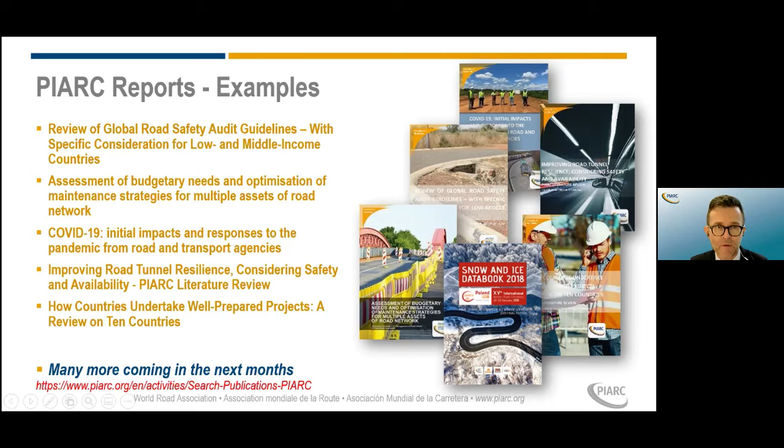All these reports are available from our website, and on average, we publish one report every month approximately. That's an average, but it gives you an idea of how many reports you can find on our website. We also have online manuals.

These are actually websites focused on road safety and asset management, which I think could be interesting for today. They were updated in 2019, and they are very, very easy to use. You can check them from your smartphone if you want. They are presented in a way that is, I hope, very easy to understand.

They are not only one report, they are a gateway or a portal to lots of knowledge, which is nicely structured. Software such as HDM4, QRAM to help manage the transportation of dangerous goods in tunnels—this is also us. So as you may see from our website, we have hundreds of reports available. That's a lot, but we need to continue, because roads and road transport keep improving.

In many countries, roads represent about 80% of all inland transport, and they're really the gateway to remote or rural regions in particular. In urban areas, roads are needed for cars, buses, car sharing, electric vehicles—all these fashionable transportation modes—most of them require roads.

This is why we at PIARC believe roads are key for equity, inclusivity, and accessibility. Roads are ready to support many sustainable and low carbon developments, and roads are here to stay, they're not going to disappear. This is why we keep on working to improve the roads.

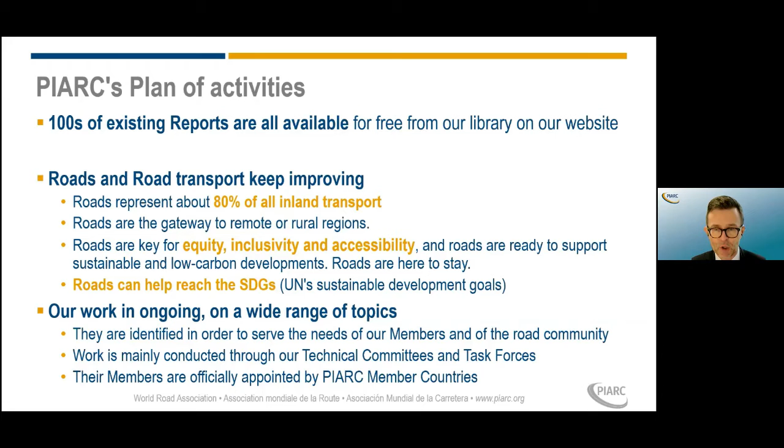We identify a large number of topics so that we serve the needs of our members and of the road community. The work is conducted through our technical committees and task forces, as I was presenting, and the members of those task forces and committees are officially appointed by PIARC member countries. So we are very open, but very focused on serving the needs of our members, and in particular of our member governments.

We develop a work plan that covers four years, and this plan is quite detailed, as you may see from our website, but it also reflects global trends, including trends that go beyond roads. For the 2020 to 2023 period, including today, those cross-cutting issues include climate change and resilience, which are very relevant for the seminar today, tomorrow and the day after, road safety and innovation. This is the picture of our strategic plan.

Winter service is here, but you may be interested in many of these other topics, maybe not today, but for a future seminar.

Winter service is really well positioned together with asset management and road safety under the umbrella of safety and sustainability. This committee is led by my colleague, Peter Nutz, who will be presenting as well and who is even moderating this seminar on PIARC's behalf.

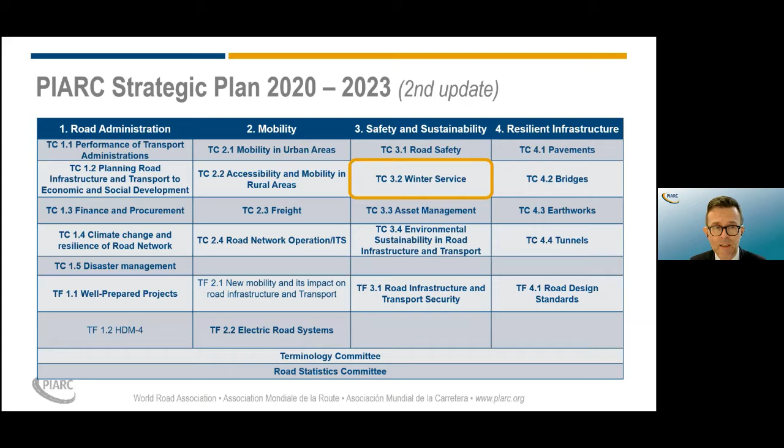Together with his team, he's developing a large number of knowledge products and reports and organizing a congress. Some of us have asked PIARC to work on COVID.

We did that. We published a report about a year ago on the impact on roads. It's true that the impact has been very significant, continuing even after COVID. But we should not forget that we still have to address all societal challenges: to reduce the carbon footprint of transportation, to help fight extreme poverty, to improve access and mobility for all, and to increase road safety.

So we have to mix the impacts of COVID, such as digitalization, with all these policy objectives, and we help our member countries make policy choices that combine all these aims.

This is why it's important to continue sharing information. What you are working on in Ukraine is probably very interesting for Argentina as well, and vice versa. So this is why PIARC exists: to help you colleagues meet and share your ideas, maybe share your issues or problems as well.

We organize lots of events, such as today's event, and we have many others planned. Just last week, we organized a seminar on climate change adaptation with Uganda. In March, we will organize another one on rural areas with Paraguay. We also have conferences, such as the Symposium on Pavement Characteristics and the Conference on Tunnels Operations and Safety, which will take place in September and October next year.

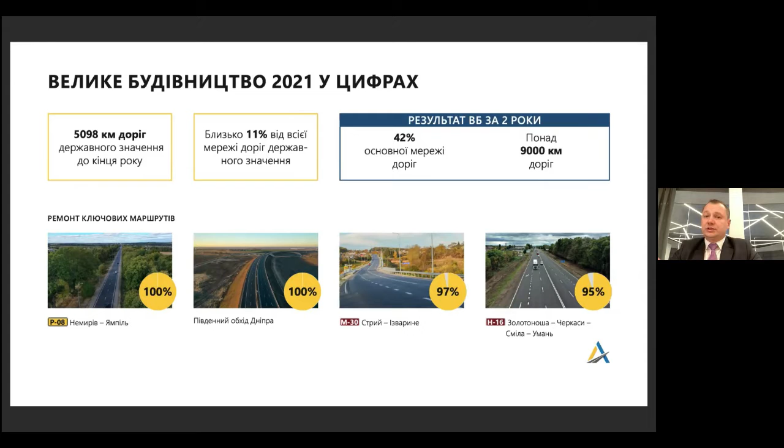So you see the images of the objects that were completed this year: R08 Nemyriv-Yampil, and the southern bypass of Dnipro. This week we will open this road. This is also the M30, an international road.

This is the longest road in Ukraine, 1,400 kilometers, and 97% of it is completed. It's high quality, well done, and completed in a very short period of time.

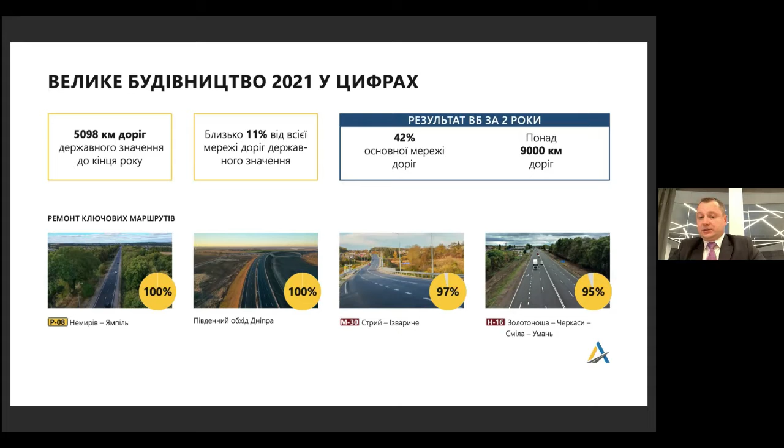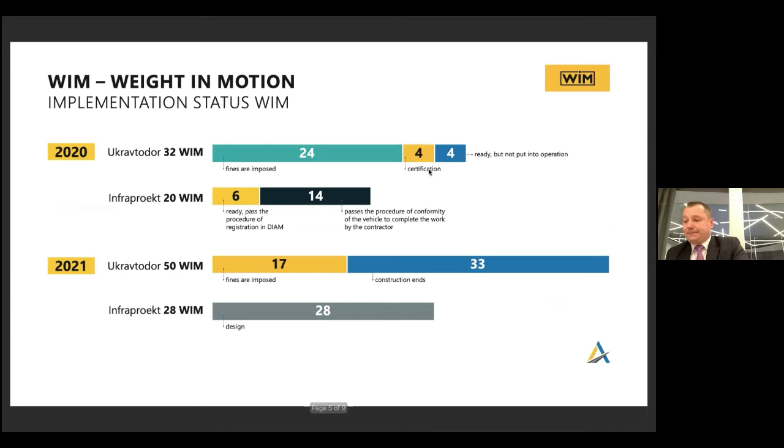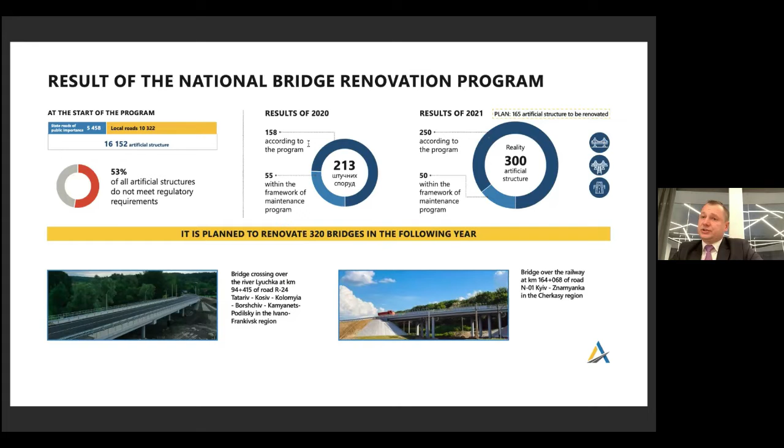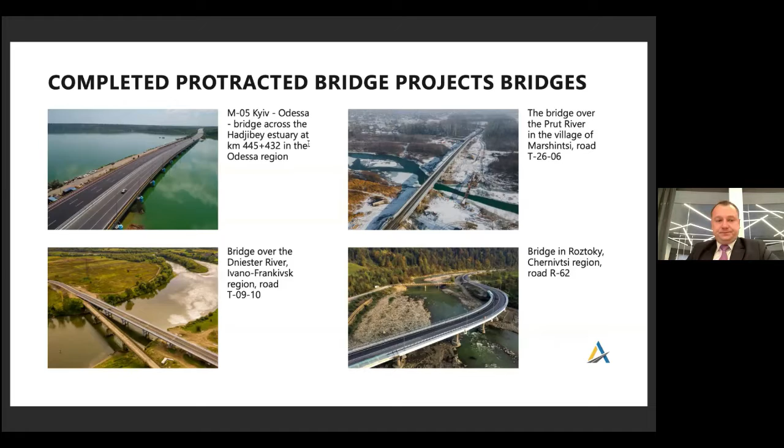So for the future, these are the plans. We hope for the next several years to complete 770 new bridges and 15,000 kilometers of motor roads. Our primary direction will be working with Kyiv bypass road.

Last week, the procedure for bidding was announced, and so we're in process of bidding. When the subcontractor wins the bidding procedure, we will move toward construction of the bypass road for the Kyiv area.

Also the commercial road, 280 kilometers, Krakovets-Lviv-Brody-Rivne. The substantiation documentation is being prepared and will be filed by the end of the year. Then we'll have 2 more months for approval, and this will be a concession road planned to launch in the near future.

Kharkiv-Dnipro. This will be a very important connection between 2 major cities. Also construction for M24, to lead to the border with Hungary, and then M14 Odessa-Mariupol. And then we'll continue this road to the places where it's not reaching out yet.

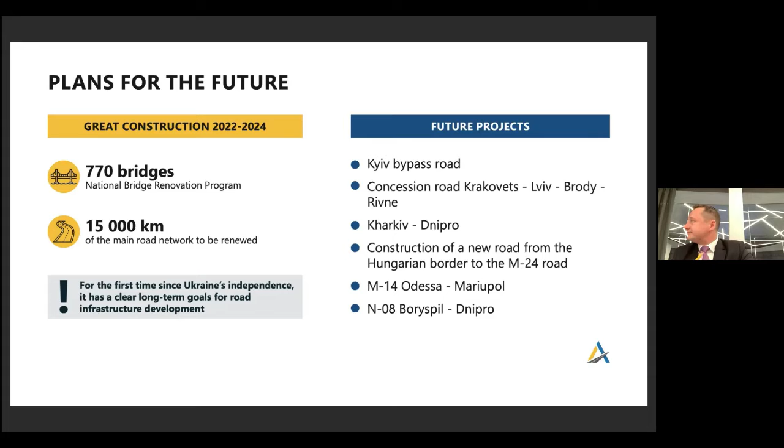So Ukravtodor has built the plans for 10 years of future development. I believe that with joint efforts, we'll be able to transform the country and its roads. So let's move forward. Thank you for your attention. I'm eager to answer your questions if you should have any.

Thank you, Andrij. So from what we see from Andrij's presentation is that the Ukrainian road industry is skyrocketing, and it will require, of course, new technology. Ukravtodor is now implementing digital technologies, and I think that this seminar will be helpful to implement new technologies in terms of road exploitation of the new roads and new bridges we have in Ukraine, or we are expecting. So, Andrij, thank you one more time, and I think that it's time for Peter Nutz to join us.

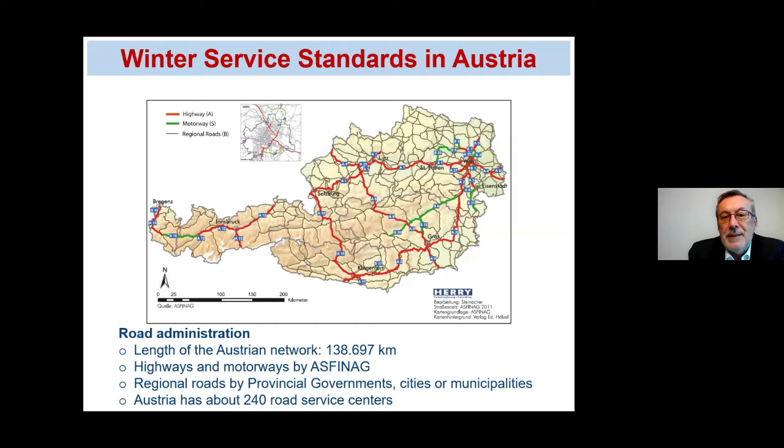You can see the road network here, the largest portion being municipal roads, and the smaller, higher-category network being highways and motorways operated by ASFINAG. These are all salt spreading routes for winter service. On other routes, it depends on the amount of traffic, and gritting material is also used in Austria.

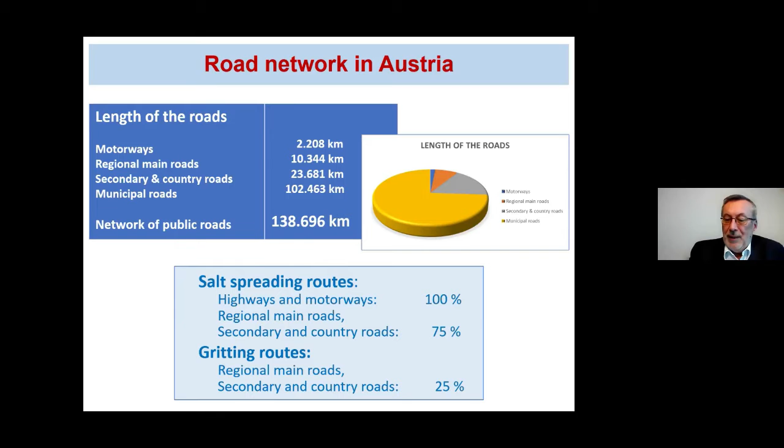As I said, motorways and federal highways are administrated and operated by ASFINAG, a private organization that earns money from road use. National roads are administrated by the 9 Austrian federal states, who are responsible for the road network in their state. Municipality roads are administered by the cities or municipalities themselves.

The legal requirements for roads in Austria: we have the Austrian General Civil Law, called ABGB, with paragraph 1319A on liability of the keeper of the road. This applies for both summer and winter. If a person is injured or something is damaged because of a defective condition of a road, the person responsible for the proper condition is liable. This means we have to do winter service, and we are responsible - whoever is the owner responsible for this road or way.

Then we have in the road traffic regulation a paragraph on duties of residents. Residents also have to do winter service in front of their houses. In local areas, residents must clear the sidewalk along the house from 6 o'clock in the morning to 10 o'clock in the evening and grit it in case of icy conditions. They have to do this work themselves, or make a contract with someone else who does it. If there is no sidewalk, the roadside must be cleaned and gritted in a width of 1 meter in front of the house. So residents also have to do winter service.

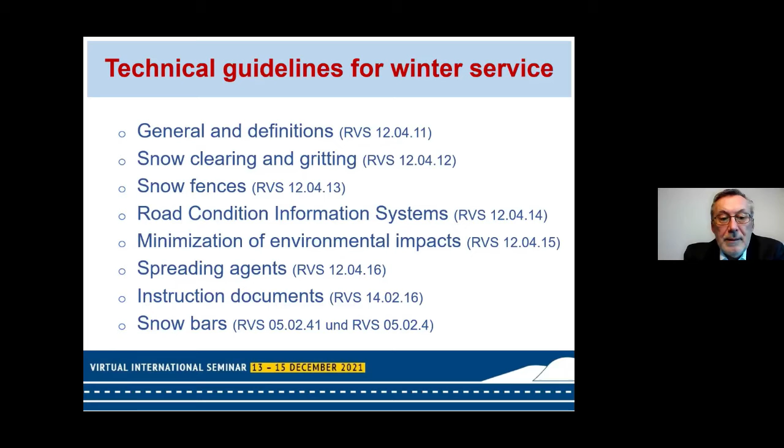What are the winter service standards in Austria? We have for highways and country roads 4 different categories, depending on the amount of traffic. The highest category A is for highways and express roads, and the winter service there must be done around the clock.

The cycle time is a maximum of 3 hours. That means within 3 hours, the snow blower and spreading car must be back, fit to start the next round. That's a minimum standard.

We have highways with a cycle time of about 40 minutes. At high level country roads, about 5,000 vehicles per day ADT, with a cycle time of 5 hours, winter service is done from about 4 o'clock in the morning to 10 o'clock in the evening. That's the minimum standard. Whoever is responsible for the winter service has the opportunity to order winter service around the clock in case of this situation.

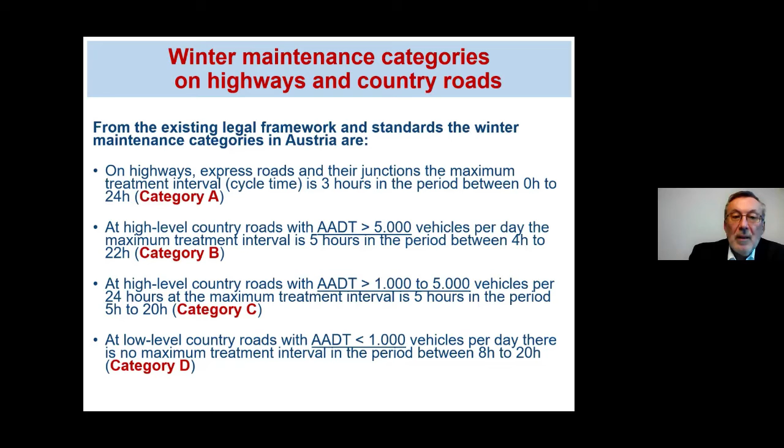This table shows what they have to do in category A. The left column shows the weather situation: light snowfall, heavy snowfall, snowdrift, avalanches, extreme ice, and freezing rain. It shows what the winter service stations have to do, including the maintenance cycle time. That's all for highways and country roads.

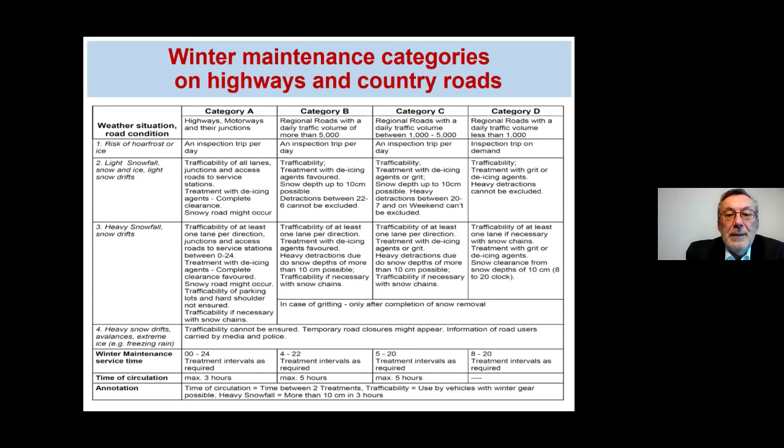For urban areas, cities and municipalities, there are standards with 7 priorities. Priority 1 is the highest, for inner city main roads, going down to priorities 4 and 5 for cycling lanes, which also need winter service. The last ones are priority 6 for sidewalks, and priority 7 for parking areas.

And also for different weather situations, the standards are written down showing what the winter maintenance stations have to do as a minimum, in cases of slight snowfall, heavy snowfall, and so on.

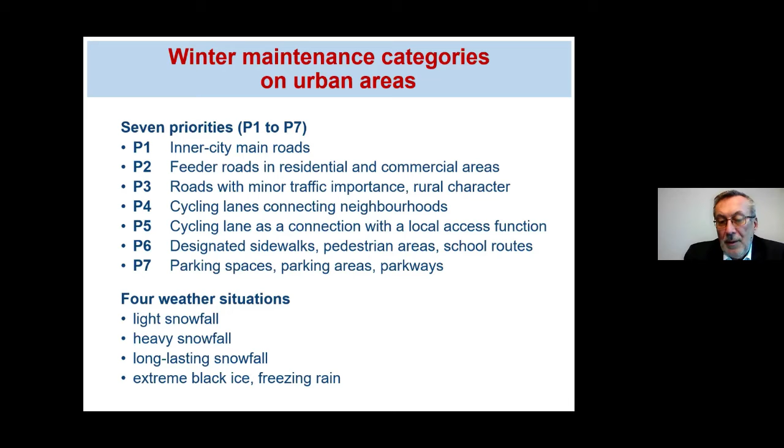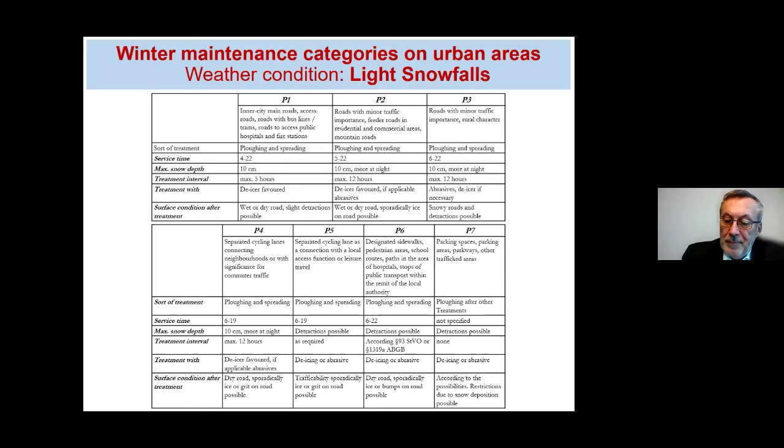In Austria, we started 10-14 years ago with winter service research projects. The first was to optimize pre-wetting salt application. The pre-wetted salting standard was FS30, 30% brine and 70% dry salt.

We asked in Austria, what can we do with other brine amounts, like 50% or 70% brine? We had a research project with the Technical University of Vienna, where Peter Nutz works and also worked on this research project. We found new spreading sheets with other amounts of brine that we had written new.

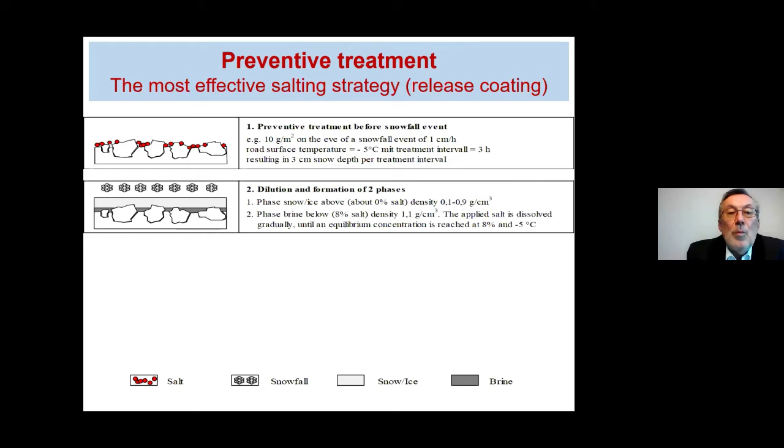They built a release, a film on the road surface so the snow cannot freeze on the road surface, and you can work well with a snowplow. Here's the next picture: the film on the road surface, and you can clean it and spray it again, and do that as long as the snow is ending.

Because of this research project, our spreading machines were changed, because we need more brine tanks on our trucks. The first step, we did it with additional brine tanks, because we sprayed more brine and less dry salt, because we see that the residual salt on the road surface is higher if you use more brine.

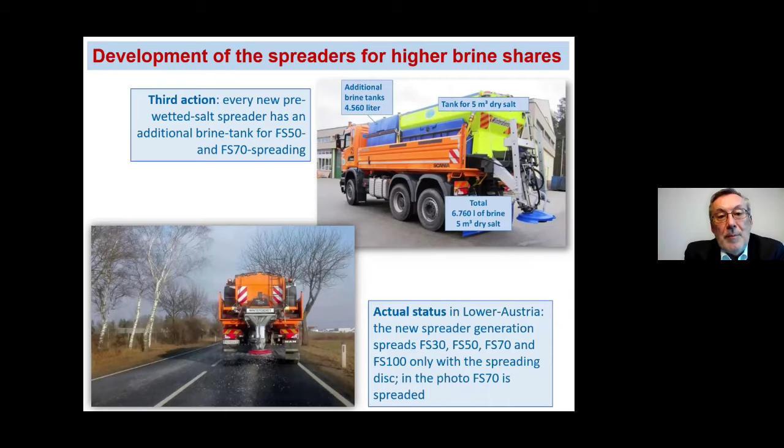And we can reduce the salt consumption: FS50, called 50% brine and 50% dry salt, to 20%; FS70, 70% brine and 30% dry salt, for 40% reduced salt consumption, compared to the former standard FS30 with 30% brine.

It's a good instrument to optimize your winter service. And when we discuss what did you do, we have also compared how much brine the different organizations use. And in the federal states, at the maintenance stations, we have charts where we compare the different maintenance stations in similar climatic conditions.

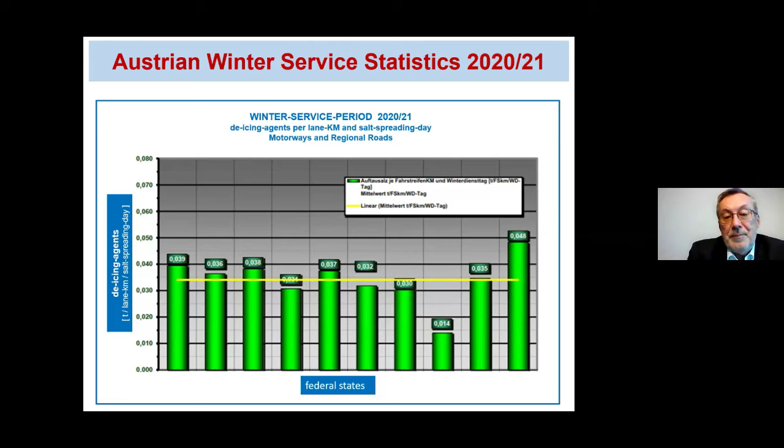So thank you. Then I can say what the standards in Austria are, the rules for winter service within Austria, and what we are working on with research projects to optimize our winter service there.

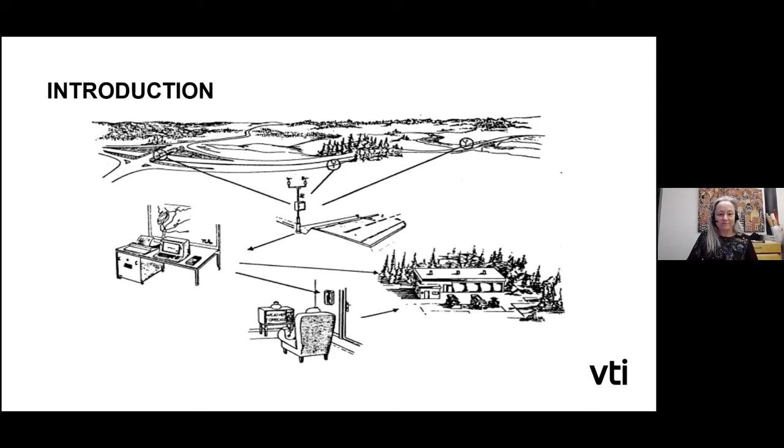And now he can get all this information back to his phone or computer in the office. And he has a lot of different other sources to use to get the weather forecasts, temperature, precipitation, road conditions, friction measurements, and everything you can wish for. It's there, you just need to organize it in a good way.

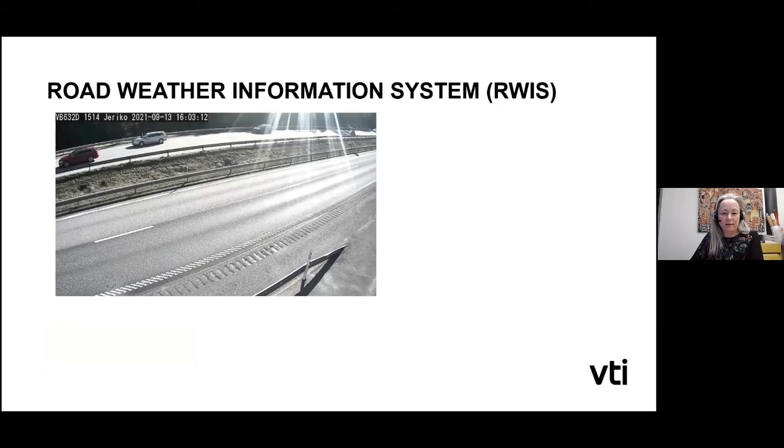The road weather information system stations, at least many of them, have cameras on today. It could be of good help to see if the road is dry, snowy or slushy, but sometimes it's too much snow so you can't even see the road - there's a snowy road between all the snowflakes. This was a couple of weeks ago, close to where I live. The snow is still on the ground.

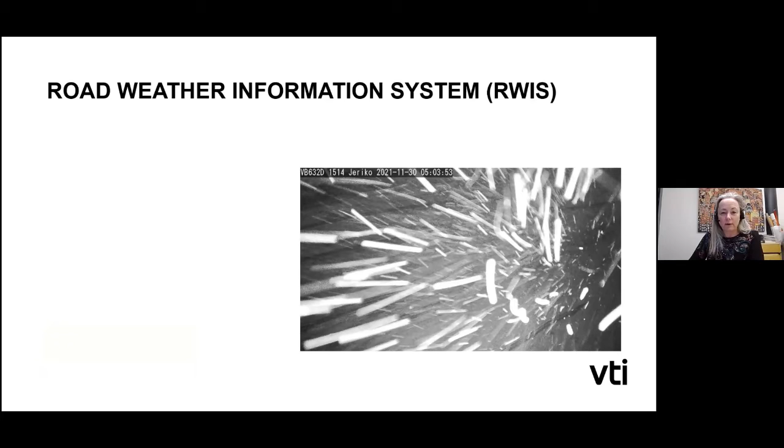We also have connected cars today that can tell the operators or drivers coming behind you about warnings if the road is slippery ahead.

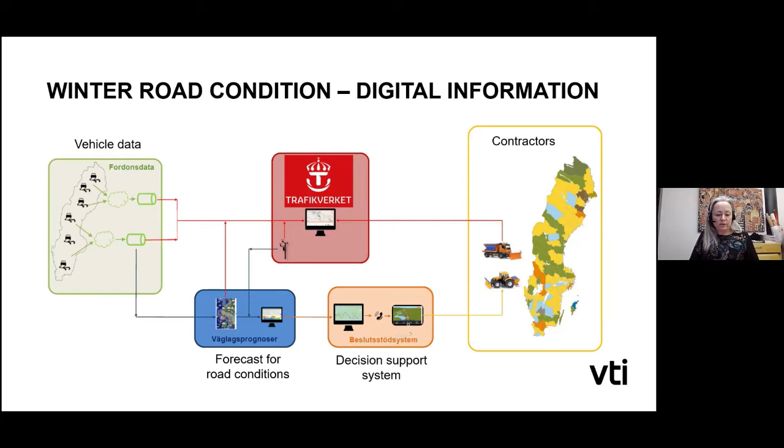This vehicle data can actually be used both to check if the actions have been done properly, for the NRAs to check up, or for forecasters to use as help for self-control when they do the forecasts for coming hours. The forecasts go to decision support systems, and the contractors can use it to make good prognosis on when it's time to go out and do the actions on the road.

The project I was involved in was called Dynamic Forecast Controlled Winter Road Maintenance. We took all different kinds of data and put it together, and I'm going to tell you a little bit about it.

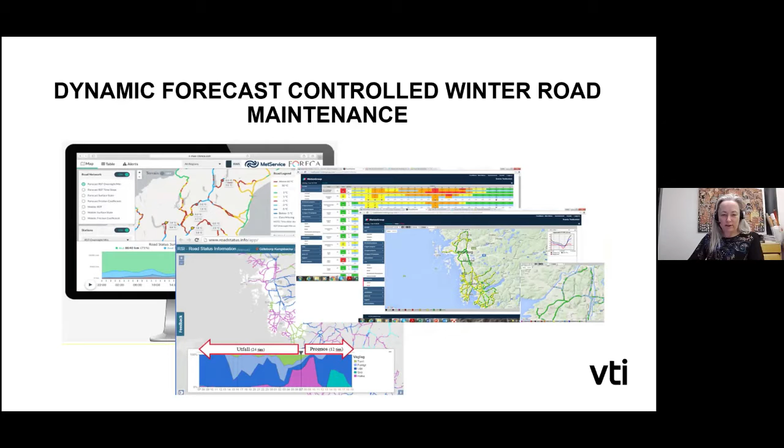We have several road weather forecast services that can provide qualified support for decision makers today. They can easily see forecasts for road conditions and temperature precipitations. The service provides a dynamic road condition forecast, and in some cases even gives proposals for the different actions needed on the road.

The main advantage with these systems is that the forecast can clearly show you which part of the road needs to be addressed and where you actually need the most salt, or if salt is already there from the last time you were out doing your action.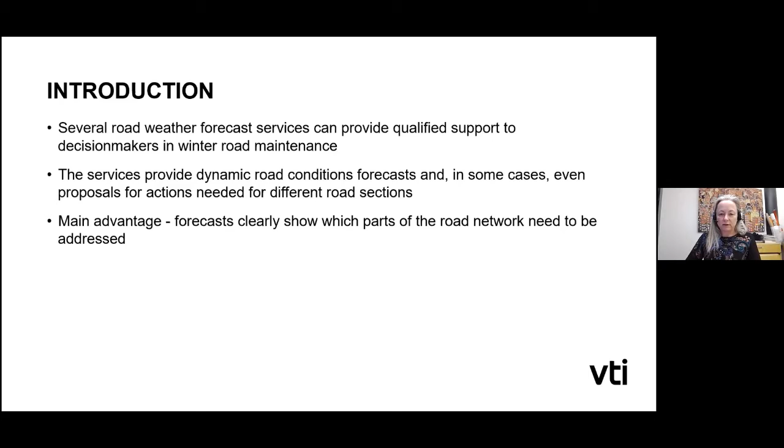So if we have all these systems to help us, how can we make it easier for the driver, and get all this information out to the person driving the truck and doing the salt spreading?

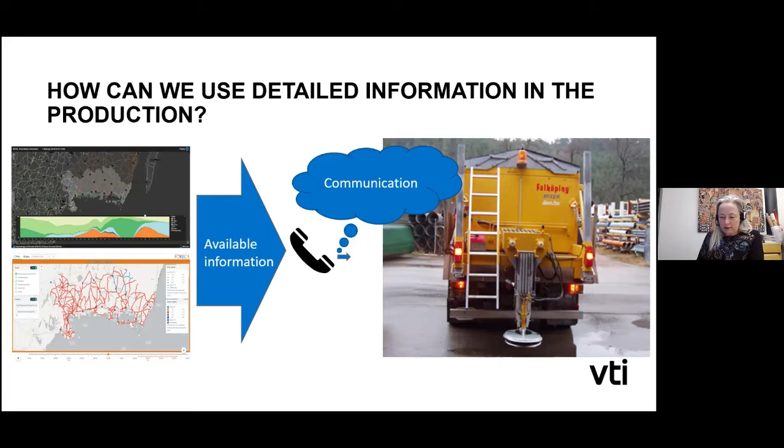This project mostly took care of preventative salting. Plowing and all those things is to come in the future, I hope.

So why do we want to make it dynamic optimization? We want to do it because we can have different weather in different sections of the road, and if we can optimize this, it's going to get us more money in the end. We're going to save money in the end.

Today we have a labor market that's very flexible. We have short contracts, increased delivery controls, personnel retiring, and it's quite difficult to get personnel to work in winter maintenance.

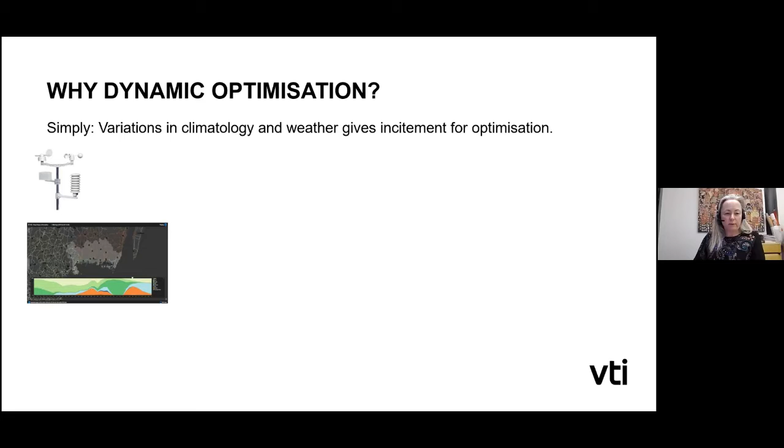With these new systems, we can actually take the road weather station data, get a bigger picture of it, see how the weather is going to be in 4 hours or so, and plan ahead in a different way.

If this light gray area is the area you need to treat, there are lots of bigger and smaller roads, just as Josef told in his presentation, with different types of roads requiring different kinds of treatments.

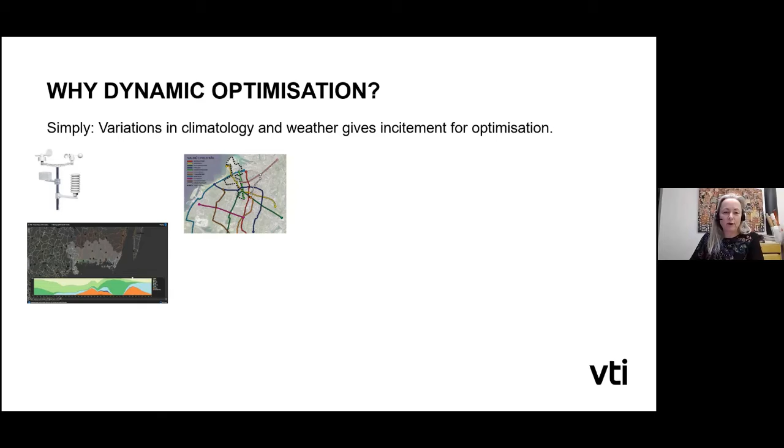If we have a route optimization of this, it could look like this, with different cars driving in different colors. Some sections of the road are really complicated to drive.

But if we take all this and put it together, then we know, okay, I have the need of 5 cars or something, then I call them out. I don't have to call them one by one as you used to. You can use the computer, and the computer calls or sends them a text asking, would you do this route?

Can you go out and do your work in an hour? And the driver can say, yes, I'm fine, I'll do that. Then he gets the navigation route sent to his truck, and he just goes to the truck, starts driving, and gets instructions.

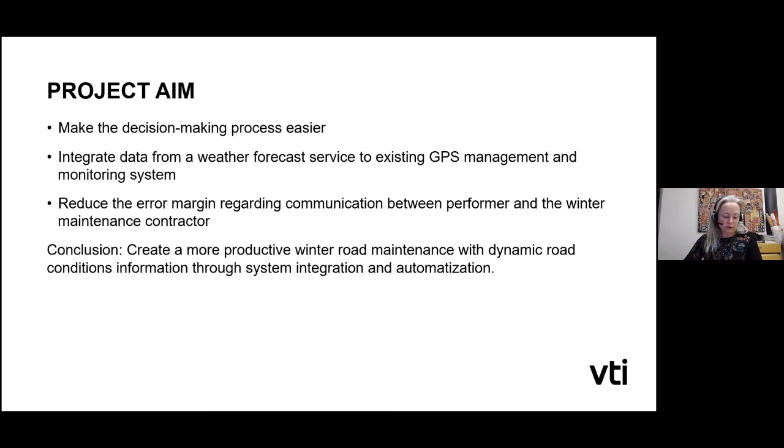The aim of the project was to make decision making easier for the people taking decisions, integrate data from the weather forecast service into existing GPS management and monitoring systems, reduce the error margin regarding communication between performer and the winter maintenance contractor, and get more productive winter road maintenance with dynamic road conditions through integration and automation, and in the end, a better road.

The project has been in 5 phases so far. The first phase was to try to see if it actually worked to do like we thought it should be done. The second phase was to implement the project and try to adapt it in the real world.

We started by trying the call out, then the call out with a static route. The third thing we did was the call out with navigation on the static route, and finally call out with navigation and dynamic route.

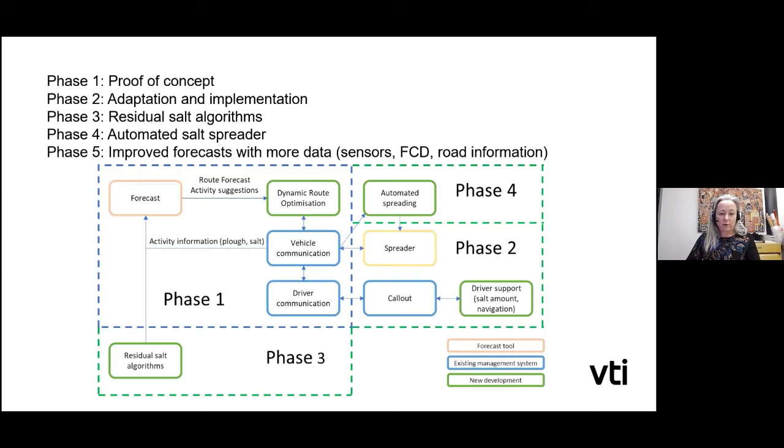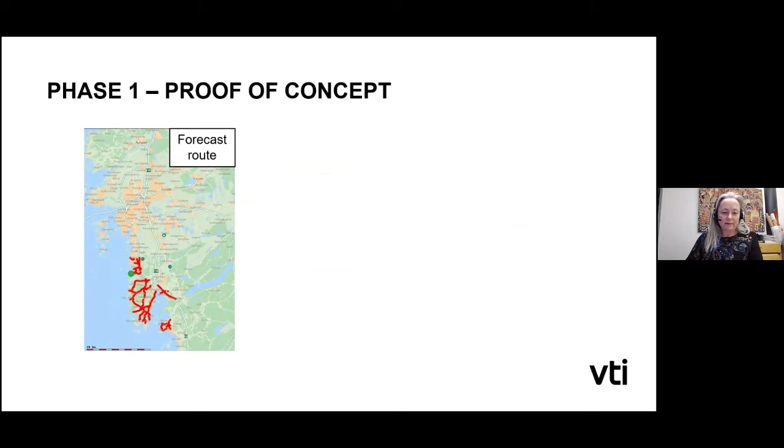This is from phase 1, where we had the forecast. The red shows where it should be slippery according to the prognosis. You need salt. We did an optimization with 2 vehicles and got this example.

So it could have been a lot cheaper than it actually became for the manager this day. But since he didn't trust our prognosis, he did it the way he usually does. Better to be safe than sorry.

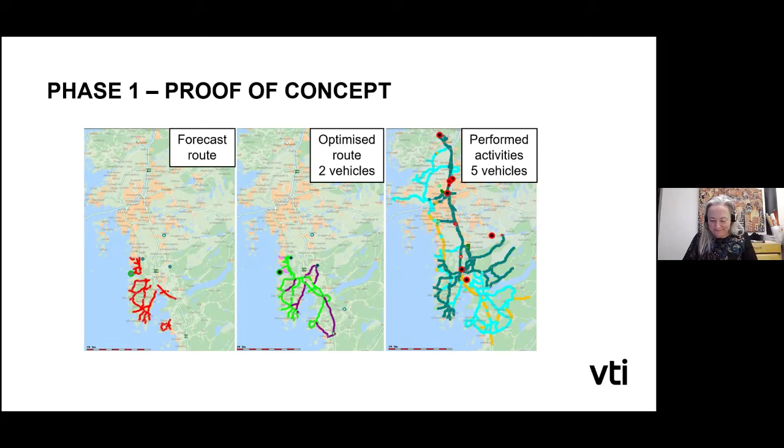And we saw that the concept was working: calculated reductions in machine hours, reduction of salt and emissions by 15 to 25% throughout the winter season.

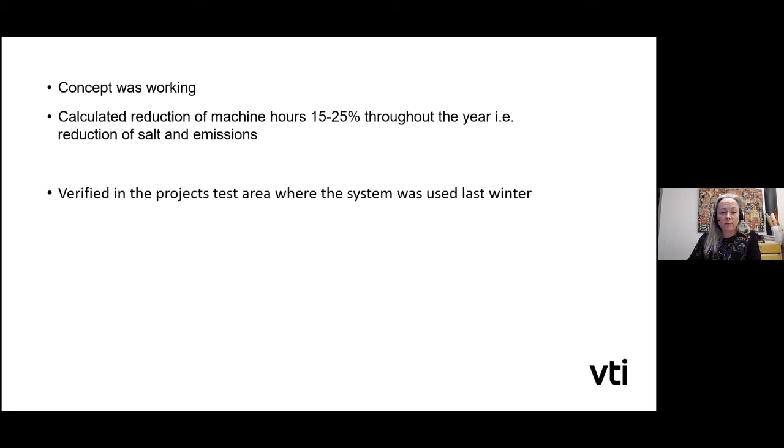This was in 2019, I think. Then last winter we did a verification in a test area, and it actually worked — the numbers were correct when we did it in real conditions.

In phase 2, we tried the whole chain: the forecast with optimizations, the call out, the driver saying yes or no. He had a choice — if he said no, we'd call out another driver. We sent the route to the truck, and he went out on his shift and followed the map he got.

All the functions were working, and the only problem was how good the forecasts were in the beginning, because if the forecasts aren't good, it could cause trouble down the road.

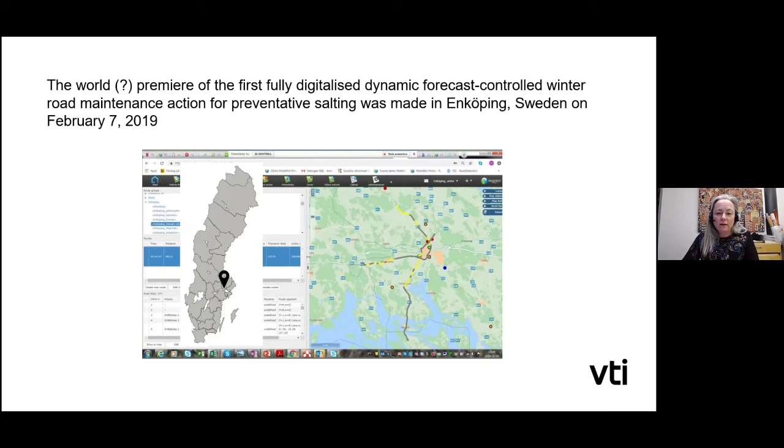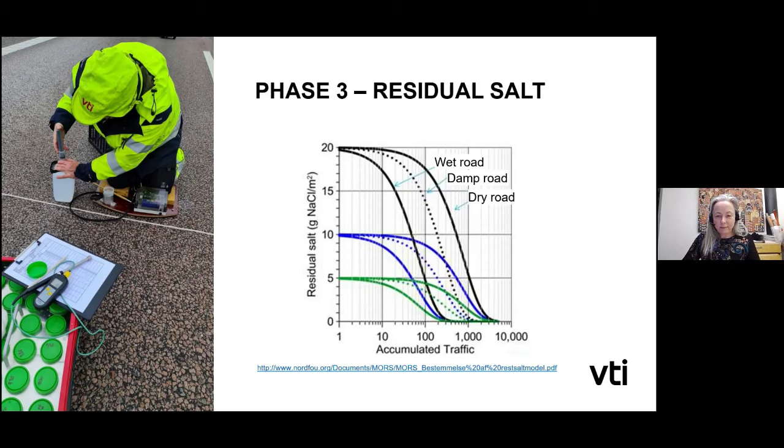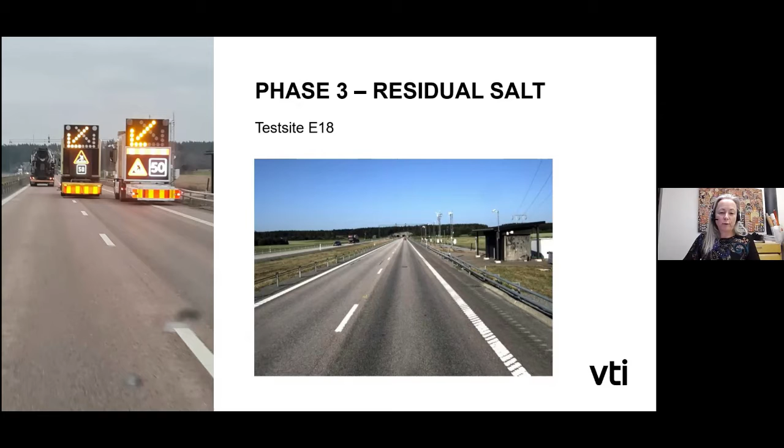We did measurements of salt at test site E18, a test area on a highway. We have sensors and road weather stations, and we can measure almost everything in and above the road.

Here's my colleague doing salt samples, starting from the edge of the road and throughout both lanes. This was done in November last year.

The day before we were here, there was no precipitation. At the moment when he sat there, it was 4 degrees in the air and 6 degrees on the road surface. They had salted in the morning before we arrived.

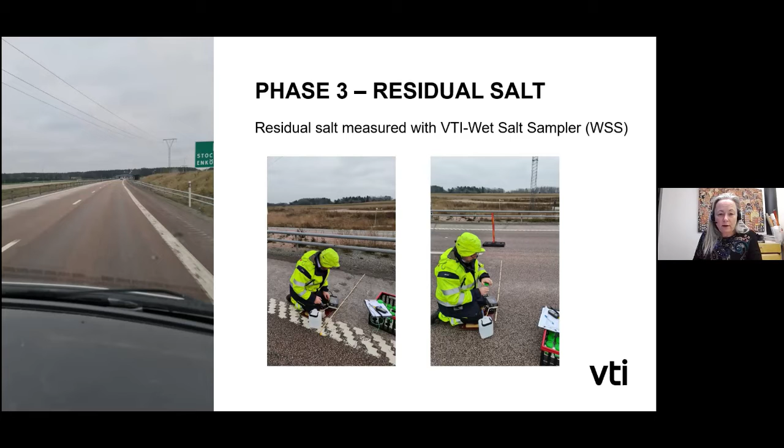We used the VTI wet salt sampler, with a syringe containing a known amount of distilled water. We put it in a cylinder against the road, and the salt dissolves, so we can measure the conductivity in the water. We also take a sample back to the lab to verify our measurements, so we actually measure the correct amount.

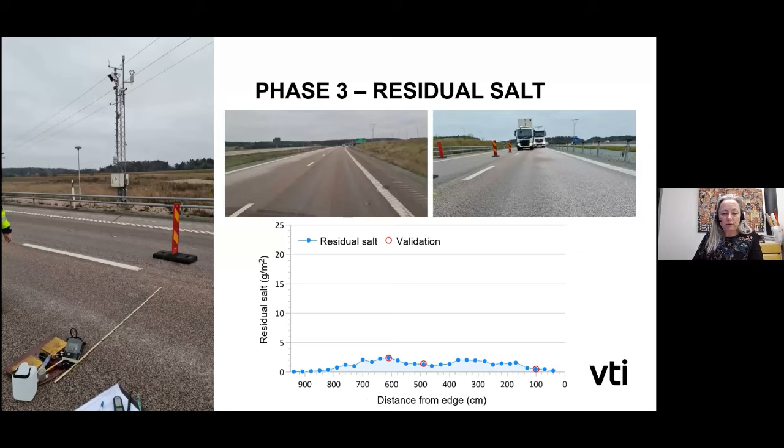This was what we measured that day — not a high amount of salt, but still there, and it varied throughout the road. This is the right edge, and this is the middle of the road over here. The red rings are the validation samples we sent to the lab.

We tested against all different kinds of sensors at the test site. The small black dots on the big picture here were dry at the moment, so they showed no salt, and we couldn't compare with those.

1.5, and the sensor said 0.3. So a little bit of difference, but since we dissolve all the salt on the road, and the sensor can only feel the amount of salt on it when it's in solution, that's the difference between what we measured and what the sensor is measuring.

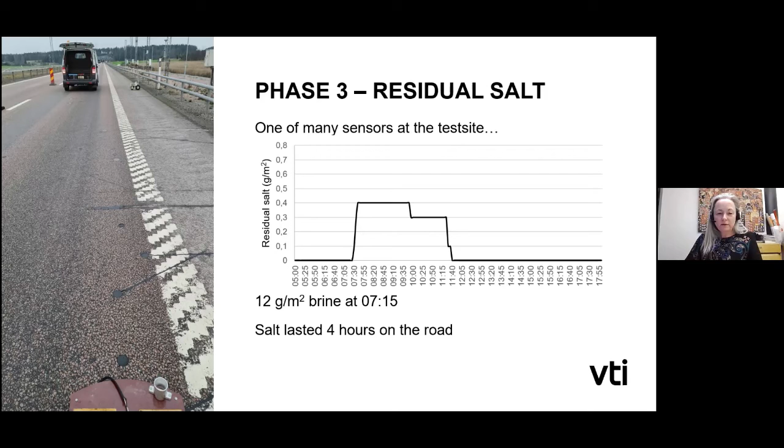The salt was gone in 4 hours, which matched what we thought it should be. We also did modeling with the residual salt model, which was a collaboration with Nordic companies on residual salt a few years ago.

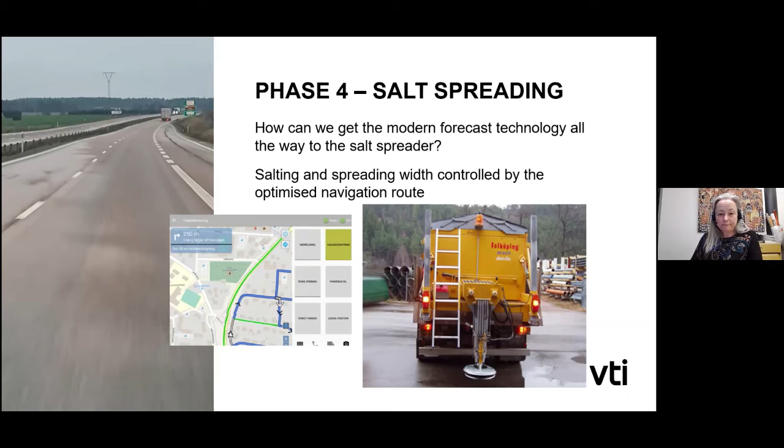I'm soon finished, I see time is running out. Salt spreading - we tried to actually do steering files for the salt spreader as well in phase 4. And it's actually working. When the driver gets his map, the car also gets his information, so the salt truck is spreading salt where it should spread more, or less, or nothing. All the driver has to do is to drive. This is actually going to be tested this winter in real conditions, and also this winter we will continue with improved forecasts, where the forecasters can get access to more data and do their better road weather prognosis.

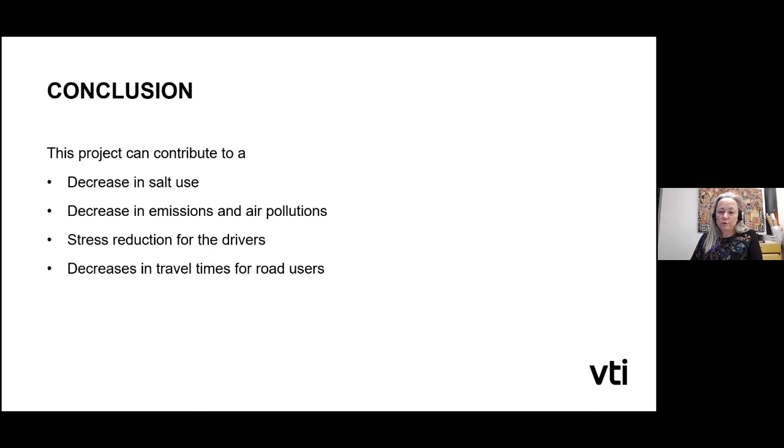Conclusion of this is that this project can be a contribution to decrease salt use, decrease emissions and air pollution, reduce at least a little bit the stress for the drivers, and decrease travel times for the road users. We were a few companies in this, and a few contributors of money for funding.

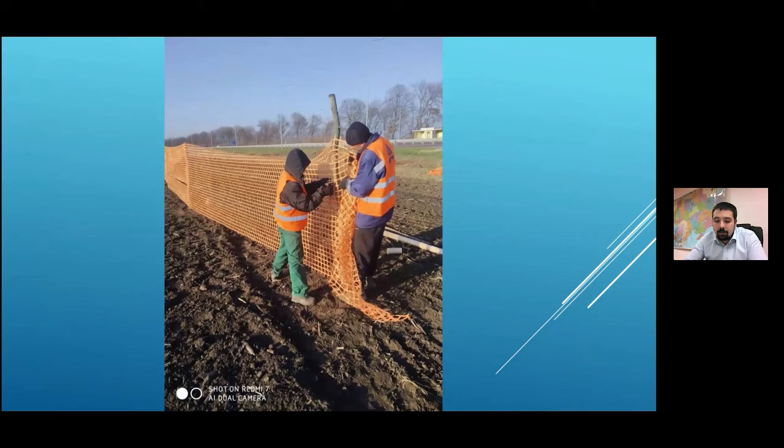Maintenance is a big complex of works. During the winter, it's road cleaning, salting, snow plowing, and implementation of passive road snow blocking techniques.

Using snow plows is very effective to prevent snow building. In case of ignoring this work, the snow can build up, and in order to alleviate the snow build-up, we need to use rotor snow plows. So we use the whole range of necessary techniques and machinery. Snow plows are used together with rotor snow plows. In order to clean the road, we also use excavators and loading machinery. So all this machinery is most effective at the bus stops, rest platforms, U-turns, and also at the parking lots.

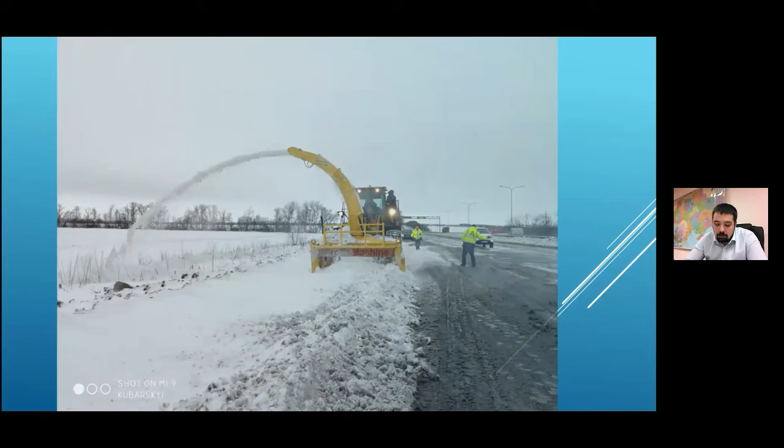During the spring and warmer season, we maintain the road cracks and potholes. We fix the fencing, install road signs, and may perform other road works. During the winter time, the northern division, after Avtomagistral-Pivden, the company is performing all the emergency road maintenance.

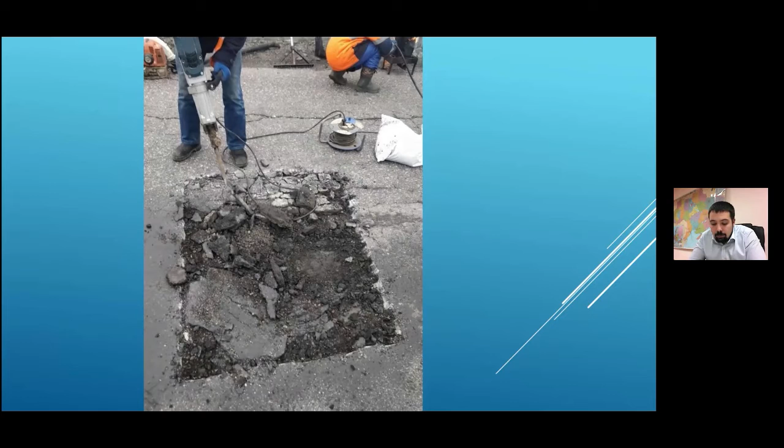We're able to use cold concrete up to 5 centimeters thick. If necessary, it's done in 2 layers. If we have a steamroller, this compaction can be done in one take, and then the recommended footage is at least 2 square meters.

The edges of the prepared block have sharp, deep edges, and we also use the technology of liquid asphalt concrete. This is a new material used with pouring techniques, combining bitumen and different grades of rock.

Asphalt is transported in mixers like these that provide for mixing of the necessary components in the necessary proportions. This is a very liquid material, floating at 220 centigrade. In the process of application, the material becomes solid and very resistant to any physical impact.

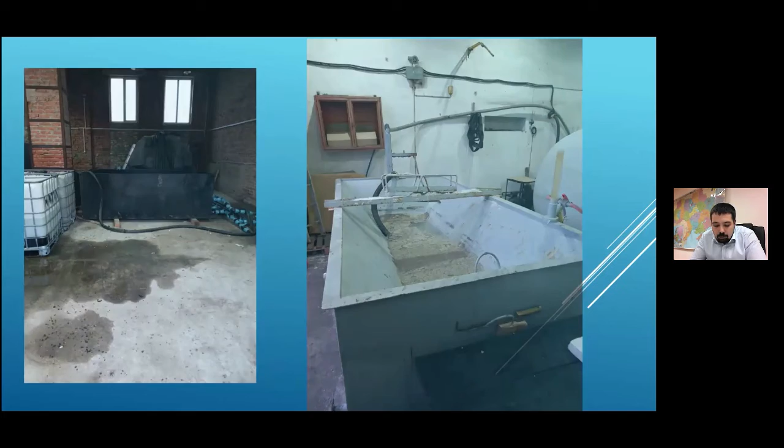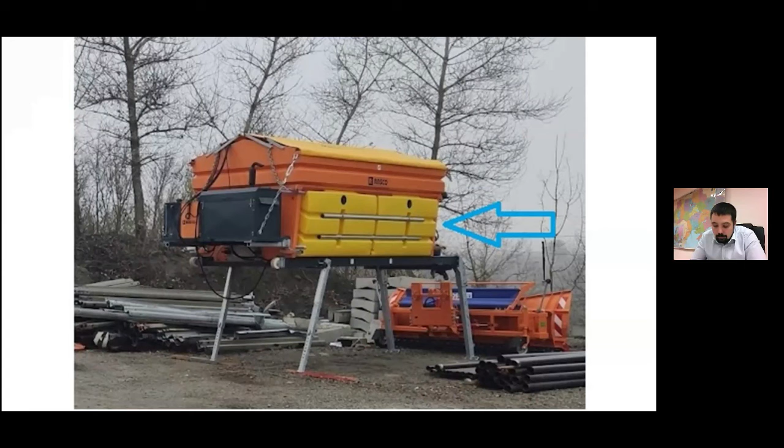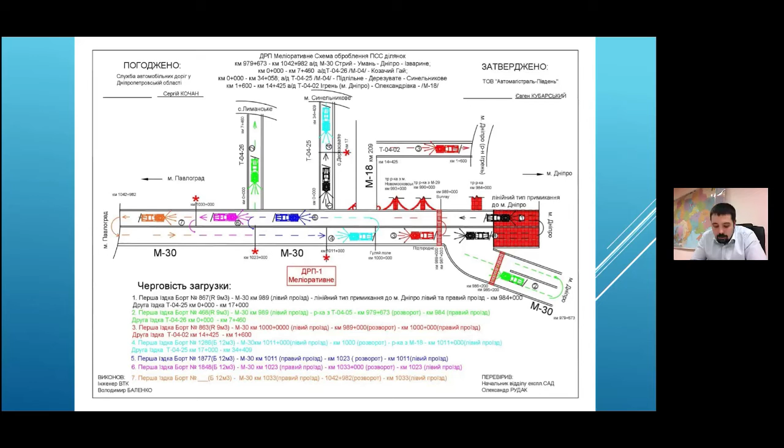The saline solution is prepared by mixing with water into a thick solution, so the solution doesn't freeze under -16 centigrade. The wet salt is heavier, and its resistance to wind is improved. The wet salt is also very efficient during dry snow and at lower temperatures.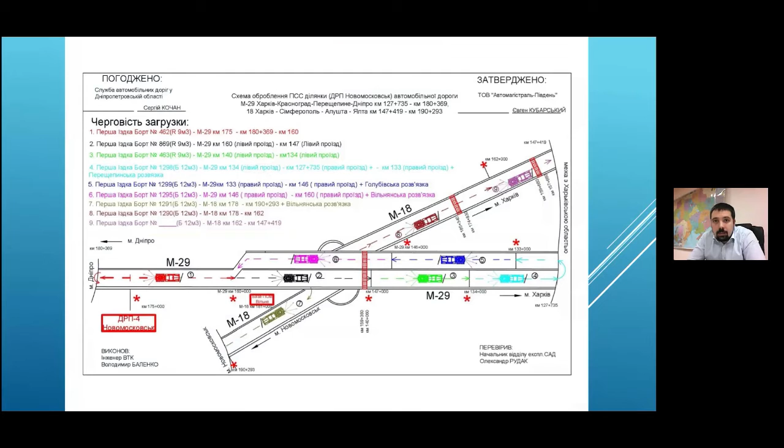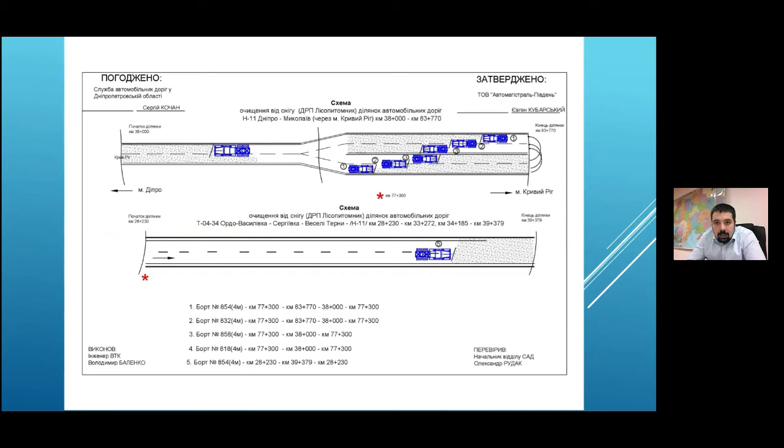All the equipment used is designated to specific roads and parts of roads, and is equipped with GPS trackers. Our dispatch services, located in the Kiev region and Dnipropetrovsk region, are able to track and monitor the situation on the roads. The company engineers have developed and agreed the technology layouts, and copies of these technological maps are issued to drivers and mechanics.

We perform ongoing training for the road service supervisors. We train personnel to act in different emergency situations. It's very important to have a team that knows the different technology processes used and acts responsibly in extreme situations during winter weather. This is very important for our company. Thank you for your attention.

Thank you very much. It was really interesting, and it was really cool to see a lot of snow that you've been plowing through on the roads. Really impressive pictures and videos. Thank you.

As we have one speaker missing in our second session later today, I think we will shift the coffee break by 10 minutes and start the questions and answers now. So the first question goes out to any of the speakers: there is still no alternative to salt, is there? Compared with Ukraine, sodium chloride is largely used and calcium chloride is not. So what's your opinion on this?

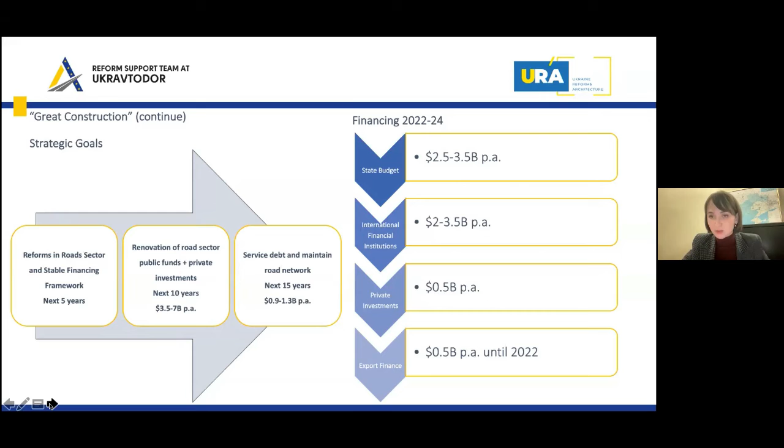The state needs to rethink its approaches to make sure that all those renovations will be safeguarded, and at the same time, the market will be as vivid as it was before.

So here are some numbers about big projects, and here is more important information about the cooperation between our key partners such as EBRD, the European Bank for Reconstruction and Development, because they, as one of our investors, help us implement key reforms.

First, it's the anti-corruption action plan, so anti-corruption reform. Second, it's reform oriented to infrastructure for e-vehicles, because at the moment any road repairs nearly do not consider the necessity for infrastructure for e-mobility. Then there's the procurement reform and the road safety reform.

Those reforms are implemented together with the biggest consultants of the EBRD, and that's how we work. We analyze, then we prepare the gap analysis, and based on the gap analysis, we prepare the plans.

So here's a short slide dedicated to the anti-corruption action plan. Why is it important to talk about it? Because of course, when we talk about maintenance or general construction works, it's not only about the techniques and technologies.

I think there are other colleagues who are much more experienced in this type of thing, because of course we're challenging those standards as well. But it's all about the effective use of public budgeting.

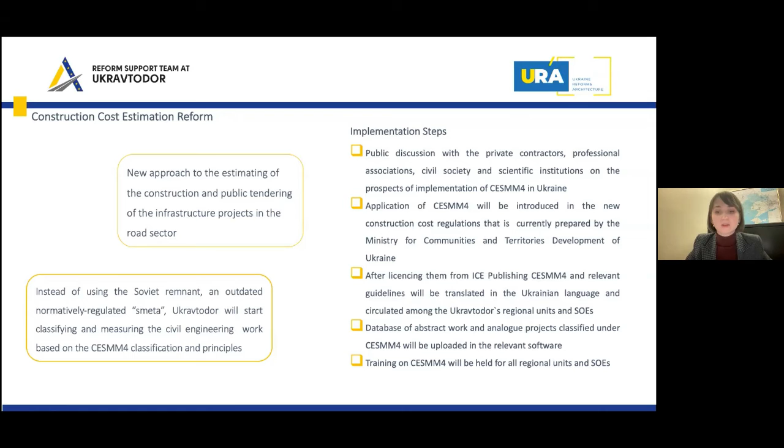Because it's already been nearly two years since we started this discussion about cost estimation with world market players, and they actually underlined that before we reform this cost estimation system, they will not enter the market. At the moment, it's a huge step.

Road safety reform is more about standards, like traffic calming standards and bypass roads. Frankly speaking, we do have issues about this because Ukraine still has very high numbers of deaths on roads, and with all our renovations we are trying to make them safer, more comfortable and predictable for users.

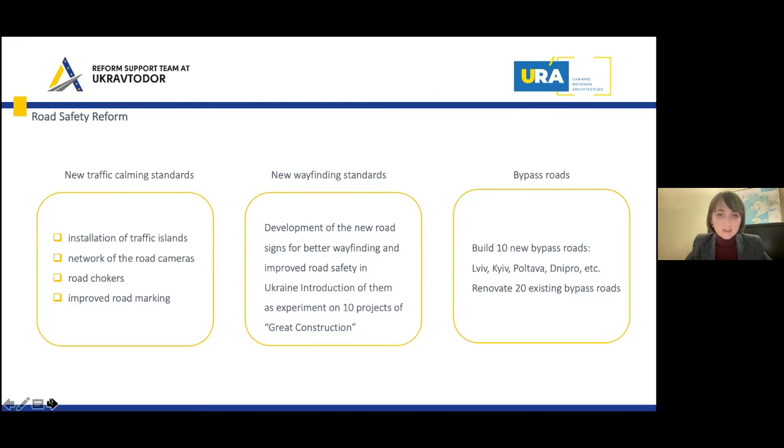Still, it's a huge issue because it's all about safety and the necessity to clean the road, to maintain the road, to really think about roads as an asset—because I think that's the biggest and most difficult question for general approaches in the road sector.

It's to make sure that road agencies, special road agencies in the regions, change their attitude towards roads and don't consider them just as objects needing some works done, but consider them as a road asset in which you need to invest, attract finances, and use them wisely, including such contracts as OPRC or others, which are rather new to the Ukrainian contract system.

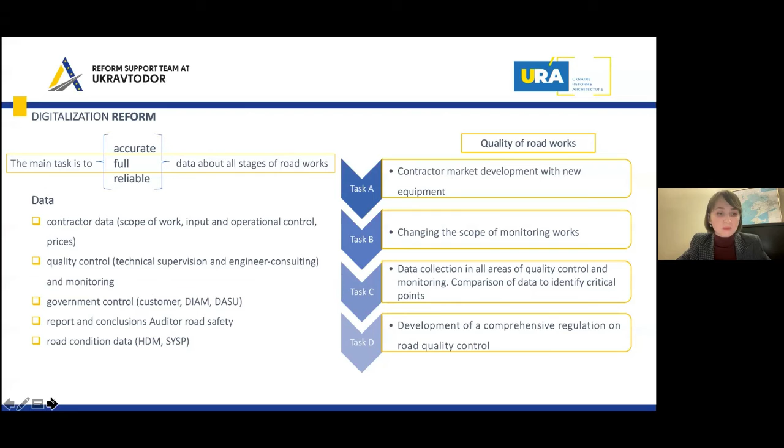I will not stop at the digitalization reform because other colleagues will talk about it in detail, but it's really important because when we digitalize everything, it's easier for us to control and check all factors. For example, with the catastrophe we had this month, if we had already implemented the e-passenger system, that would really help us work better with all transporters, not only with the infrastructure but also with road users, making it a unique, general digitalized system which provides as much data as possible to prevent such catastrophes in general.

Road maintenance data is something more important than the topic of our seminar. Data from the vehicles, GPS navigator - that's what we implemented already in 2019. Updating road passports with data on works with road maintenance is what we're doing now. Planning for maintenance road based on instrumental data on road conditions. Contractors e-office with 24/7 functionality. Traffic restrictions and emergency data based on user complaints. Planned and actual data of road works performance. That's actually the basis for the new approach to road maintenance based on the end result, or OPRS.

I could share an important example of cooperation between a road agency and one of the navigators. It's called Waze. A lot of users in Ukraine use it, first of all in the cities, but also outside the city. We actually established an automated system of exchange of information with this navigator. We can receive all data from the application, from the drivers, and at the same time we can share push notifications and urgent notifications through the application if they come in from the road agency. That's not something totally 100% automated - there are people sitting at computers sharing information, so there's something to work on. Still, it's a good example where something which already exists on the market, an application that people use, is just merged into the state system.

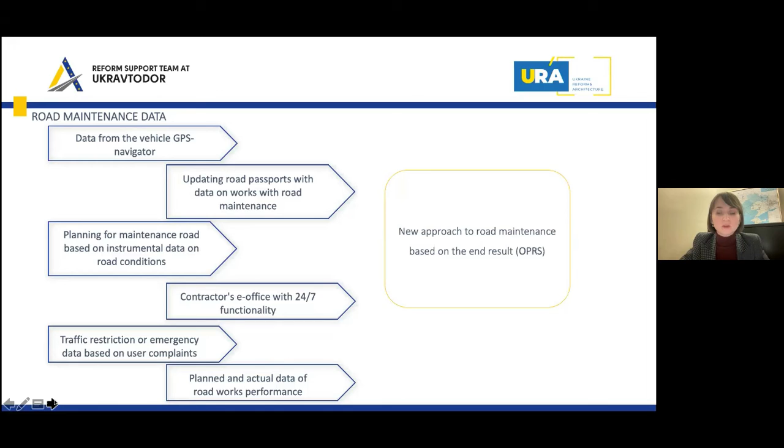We hope that with new data from the vehicles working on the maintenance project during the winter, with other projects such as e-passenger, we will have this ecosystem where it will be safe and important to share this information with full respect to privacy, but first of all to make the system predictable. Sorry if I jump from topic to topic. I will be ready to answer all your questions, and thank you for your attention.

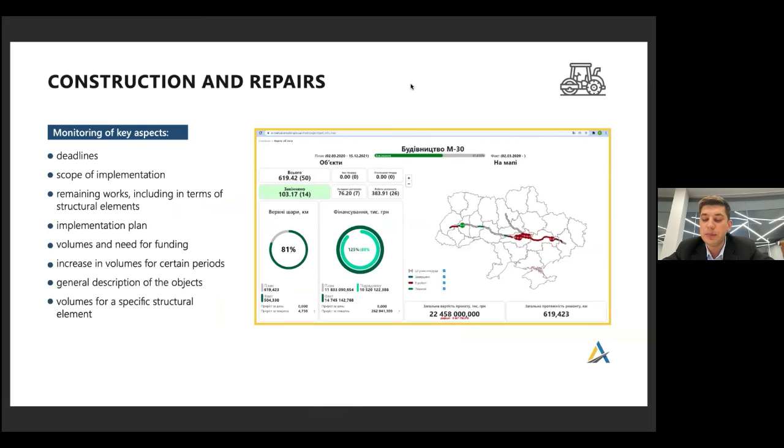Construction and repairs module helps us to control the volumes, the progress, and the remaining works to be done per object.

On a daily basis, we see information being inputted on every type of works on a specific section of the road. These sections exist in different regions.

The information is being incorporated in a single project, as with M30, the road that unites several regions of Ukraine, united in a single project. We see the implementation for the project in general, as well as we could see in detail all of the infrastructure objects located on the road.

It can be a weighing station, an intersection, a bridge. Every object has the general information related to the project, as well as specific information related to the specific section, general description, the type of works completed, the type of works to be processed. This helps us to track the process in almost real time.

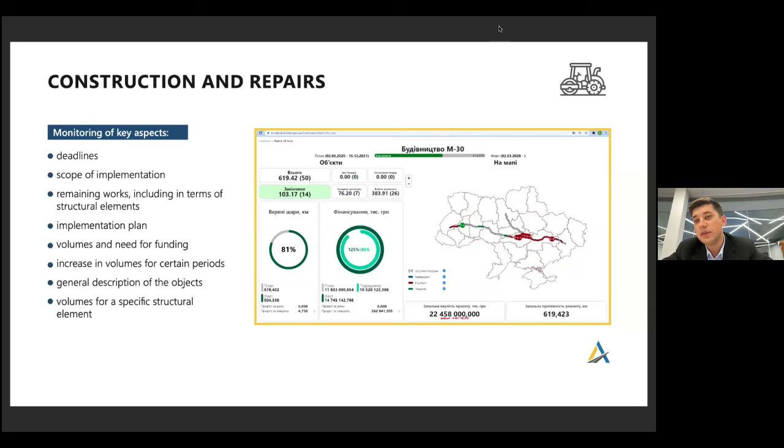Next slide, please. The next module that we are actively using currently is the electronic procurement module that is fully integrated with Prozorro system.

In order to implement this module, we also have the module of integration with state treasury and the architecture and city construction administration of inspection of Ukraine. Prozorro is the key module for procurement, and this module helps us to control the quality and quantity of purchases performed by Ukravtodor in general, per region, as well as in Ukraine in general.

It allows us to generate information related to the goods purchased, whether it's for maintenance, support, or actual construction projects.

We see information on planned dates, recent changes to procurement bids, how many bidding procedures are planned for the next week, how many bidding procedures have complaints, and how many procedures were completed, both full and simplified. This helps us forecast our current month or week and to perform active monitoring of the procurement process in order to fulfill the planned time frames and complete it in time.

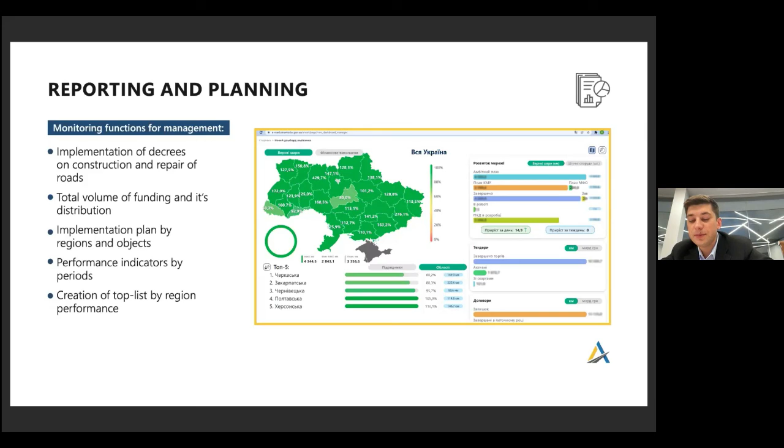Next slide, please. Since the main load is related to construction, a portion of works is related to construction and fixing of the roads, we also pay attention to maintenance.

Digitalization of road maintenance is in active phase. We developed the maintenance module of our software where this will track the works related to maintenance, and will also, based on instrumental data, assign budgets to specific road sections. We'll have to monitor the movement of transportation vehicles related to winter maintenance, and we will also collect the data related to maintenance for further analysis and further planning procedures.

So with regard to our plan, the digitalization within our structure, if I could see the next slide, please.

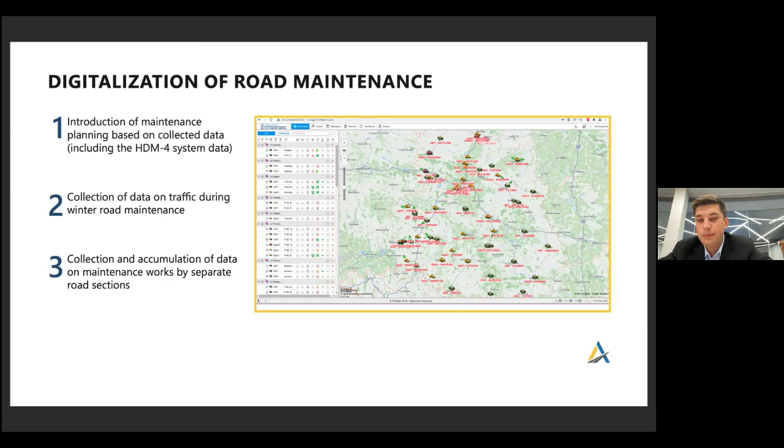What we'd like to build is we'd like to automate the bidding documentation. We can develop account for contractors and technical supervision so they can see the field real-time information. We would like to build the information database. We would like to build this united contact center and create the coordinated monitoring system for the road machinery. Another initiative is to introduce a unified electronic documentation management system for our subcontracting businesses. And we'd like to develop the network of traffic monitoring stations in order to build heat maps of the road traffic on the territory of Ukraine.

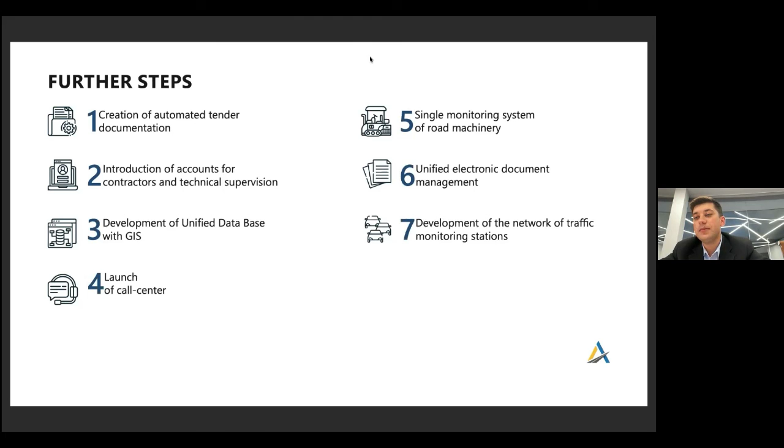There is one question, maybe for both of you who just spoke. You spoke a lot about tenders and contractors, and I was wondering how long is a typical contract for road maintenance? Is it one season, one year, or is it longer, like ten years, or somewhere in between? Yes, as of today, there are long-term contracts that last as long as 3 years. Okay, thank you. Are there any other questions?